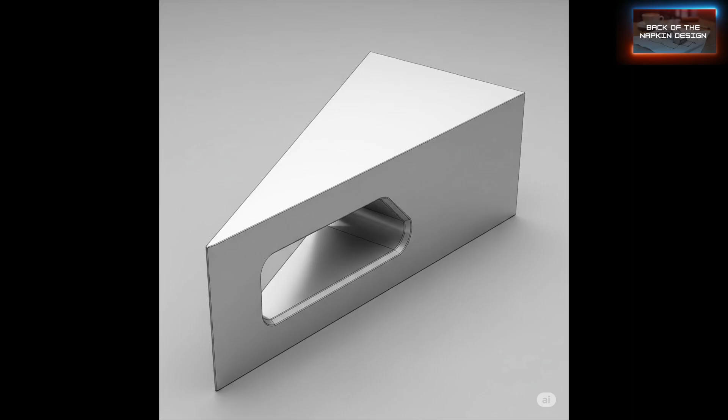Hello, today we will be building this in Onshape. Looks like a fairly simple design. Let's think about how we will do this in Onshape.

My guess is I would start with a sketch on a plane, extrude out this surface right here, extrude that down, then I will go through and create this slot on this flat surface right here and extrude that through. I'll add some chamfers and some small radii all the way around the part.

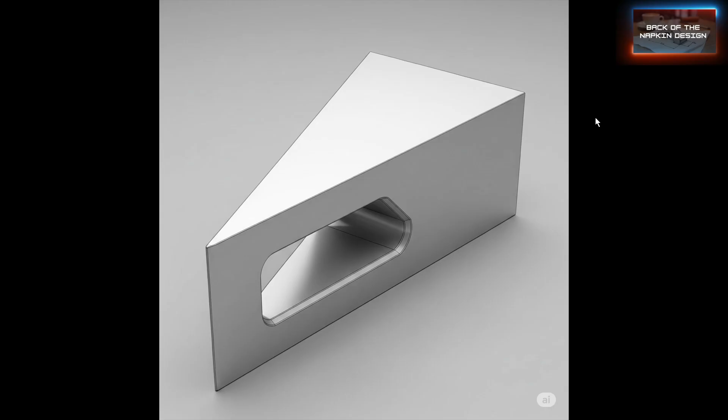Alright, let's get started. Take a screenshot of this if you want, and I'm going to put it on my second screen and use it for reference.

So we're going to use Onshape. This is a free subscription of Onshape. I'm going to go to Create.

Document. Alright, and I think I'm going to start with my top plane right here so I can hide the front. Left click and left click on this guy and hit Y for hiding those.

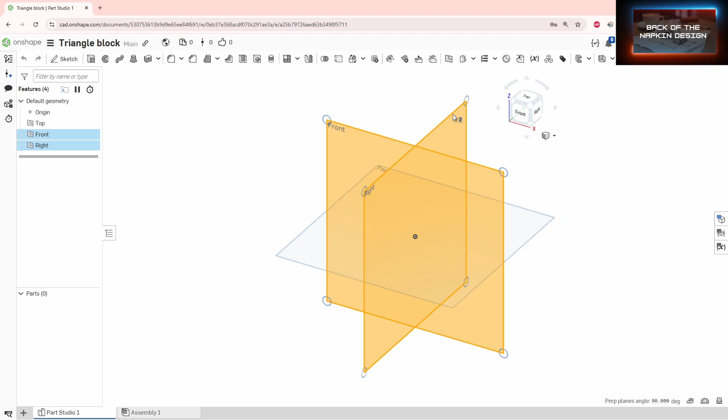Now we can go to our top plane right here, and using my middle mouse button, holding that down, I do my pan, and my zoom is with my scroll wheel, and then I can rotate it with my right mouse button, moving the right mouse button does rotation.

Okay, let's go back to the top view. Okay, and let's build our triangle. So we want to sketch on the top view, and we can grab and throw this around if we want. So let's just build a triangle here.

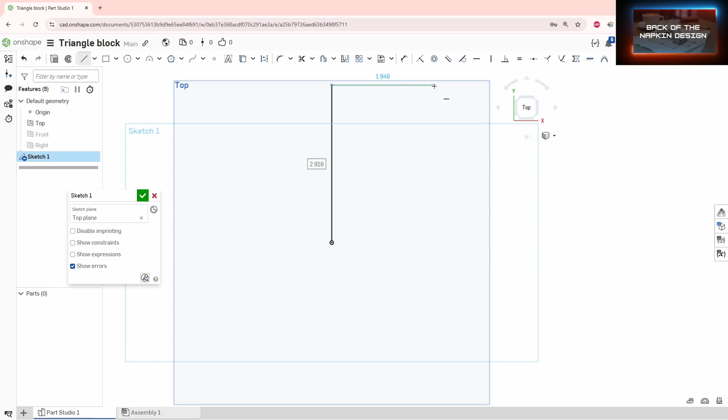This side is vertical, and we will build. We're working in inches today, so I'm gonna go with 2 inches, and we can adjust this now.

So let's hit D for dimension, that guy right there. So here to here, we'll go with 2 inches. Here to here, we're gonna do like 3 inches. Okay, and it is 100%

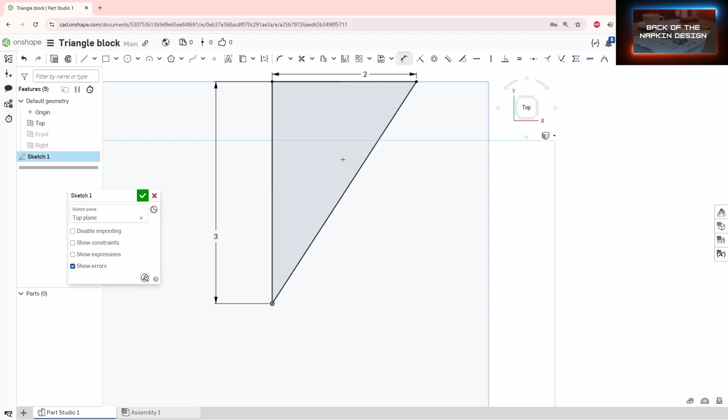constrained because everything is black. All right, let's finish the sketch. Green check. Let's rotate it with my mouse button holding down, pan it, and then let's get out.

Let's go with the extrude. We're gonna click on this right here. Everything is orange. We're going to extrude it, let's say 2 inches. Redo that, double click, get in here and change that to 2.

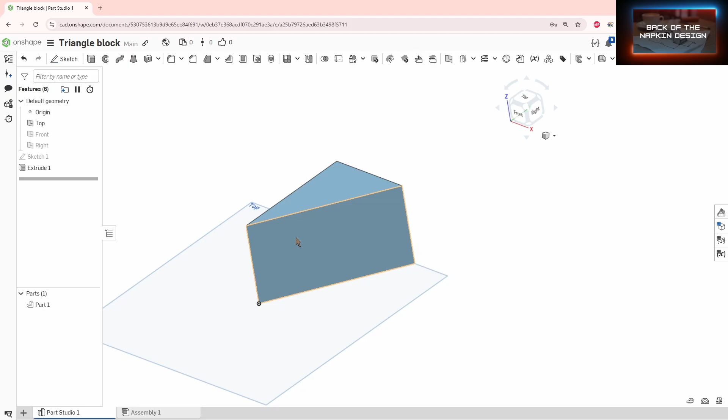Enter, green check. All right, so now we want to build that shape on the back side of this, and we want to use this as our sketching plane. So let's go to sketch, click on that plane right there.

Let's click on left. Let me go with a rectangle. Okay, and I want to have it roughly equivalent to both sides.

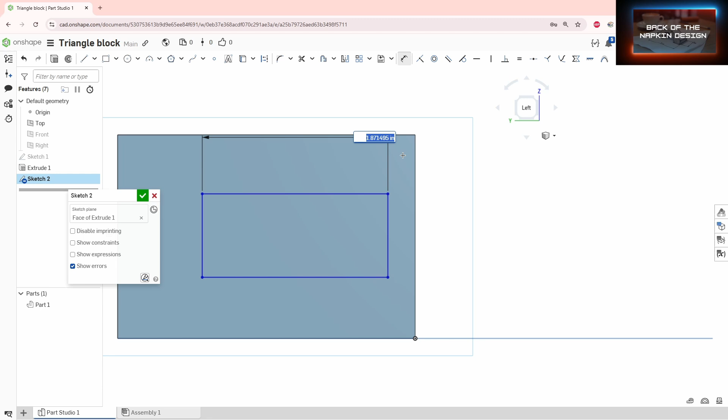So let's hit distance from here to here. .5 inch bottom line here to here. 0.5. Now we're going to go here to here.

0.5. And here, let's add the little contour shape to the very top here.

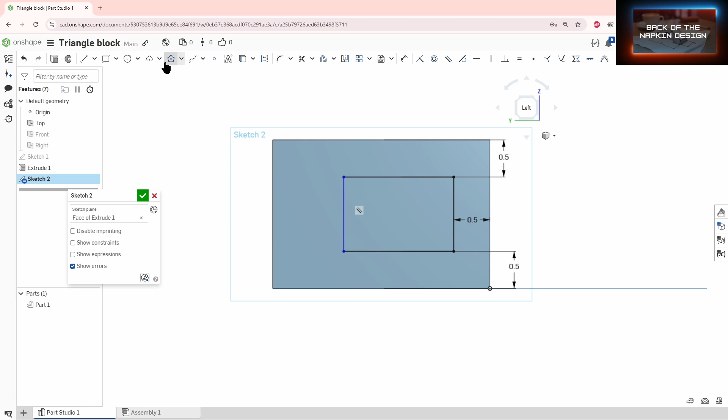So I'll just click on line. We'll click, we're going to click on that line, and we're going to bring it straight down, and we're going to kind of hover over this line, and we should see a dotted line. So we want to go take it right there, connect these two together. If you see that rounded thing, just go back and it should let you do a flat.

Let's hit M for trim. We're going to trim this guy right here. Now we're going to do a dimension, D for dimension, click here, click here.

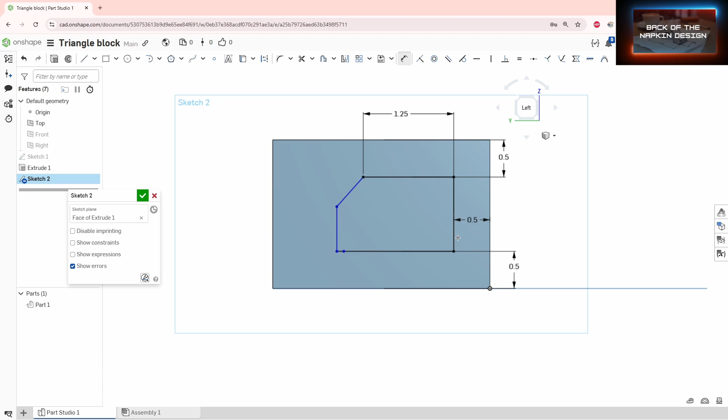We're going to change to 1.25, and then here to here, 1.75, okay? And then we're going to add a fillet here, so fillet this guy to here, and 0.25, maybe I have to go bigger than that.

Let's go try that again, here to here, and we'll pull that. Let's do 0.5, double click 0.5, doesn't like it. Now it's thinking, okay.

Now it didn't like that because of this dot, I think, right here. Let's hit M. We're gonna do extend, so let's hit X. X to extend, and we're gonna move that to that guy. Now we're gonna hit get out of that extend, try that fillet again.

Here to here, 0.5, good to go. Escape to get out of that.

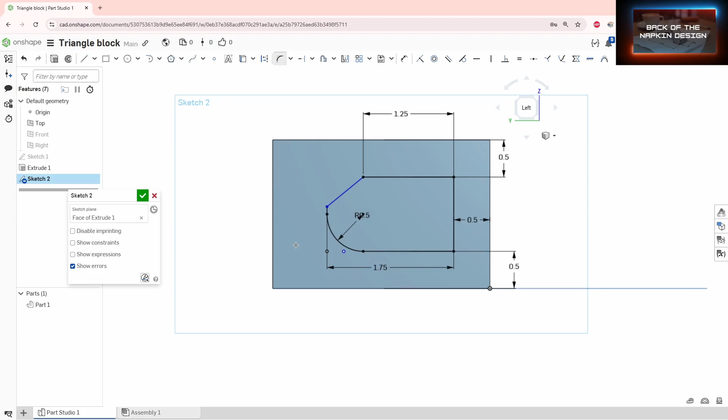All right, so now we want to finish this sketch. We can add an angle here if we want, and 40 sounds good to me. All right, finish this sketch.

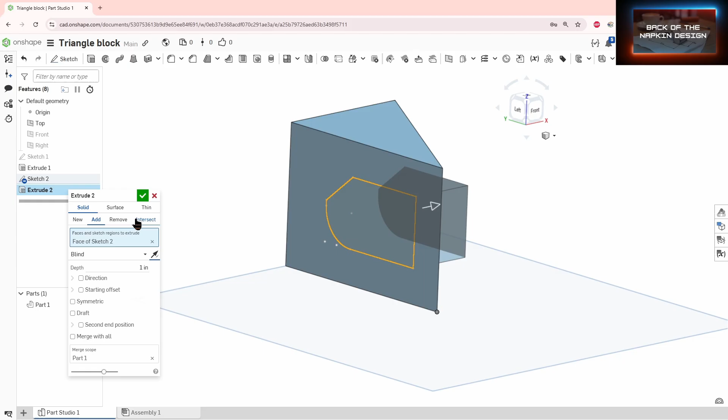Let's rotate it. Let's do a extrude. We're going to click on this guy right here. We're going to flip it the other way. Click on the little arrow right there. We're going to remove, and let's take a look and see what it looks like.

Let's hit OK. Okay, it didn't go all the way through, so here's what I can do is I can extrude it, and I can tell it to go up to this face right here, and it will blow it out. Okay, so now we see our radius is a little bit larger than what the image shows.

I can double click on that. I should be able to double click on that guy right there. Let's change that to 0.25 inch. Okay, and that looks pretty good now.

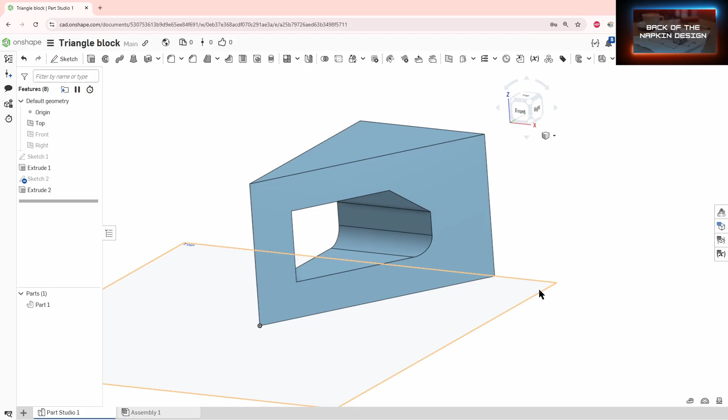We're getting closer to what it looks like. If we want to hide this, we can click on that. We can hit Y. All right, so now we're going to add our chamfer.

Just clicking on the edges. Some of them will automatically populate. I don't want it on face. Let me check the face and get just that edge right there. Just this edge right here.

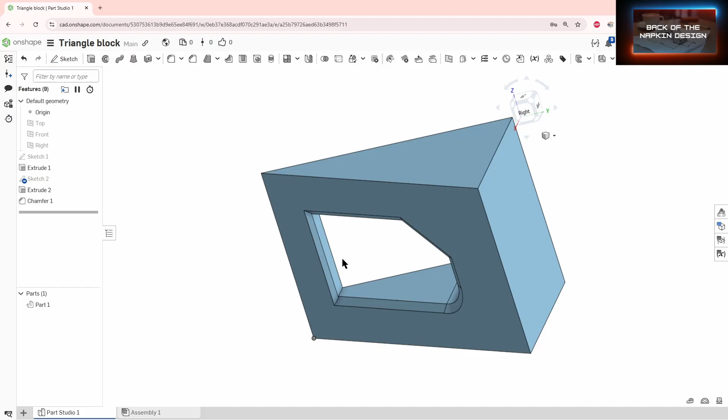Okay, green check. And now I want to add my fillets to everywhere. So click on each face, except for the internal faces. All right, green check.

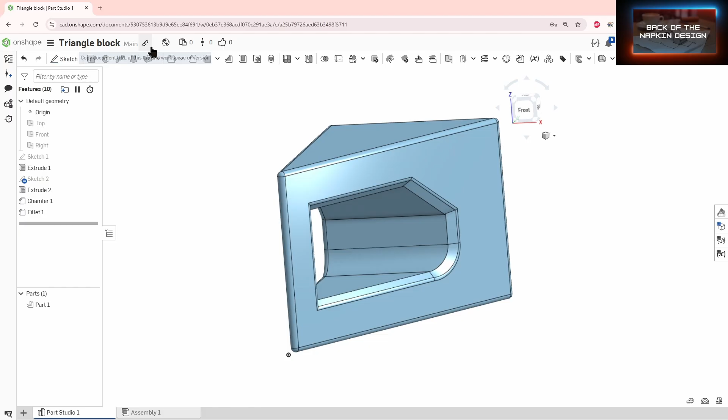All right, we have our radii, and let's put the radii on the inner edge too. Okay, it put a few of them already. It's trying to find tangent faces. And we put on that edge right there. Okay, green check. There's our part.

Let's compare it to the original part, and that's the completion of our triangle block. Thanks for watching.